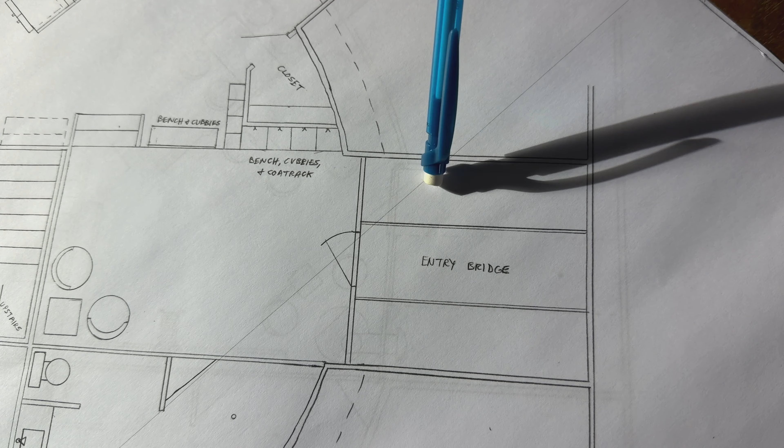We're thinking we'll put some kind of a recessed entry from outside and maybe some kind of a bridge type setup. That way the downstairs will be open — you'll actually be on the lower level, but it'll feel like you're outside, almost like an atrium downstairs. There's a drain downstairs already, so it's really set up for that. We didn't realize that, but when we met with Dale, the founder of Formworks, that's what he said this was really designed to be, so we drew it that way.

You come in across this big entryway area where you're standing right now, and we would keep that floor at a higher elevation. We come down a few steps, and then this whole level is kind of the same height, matching up with the height to the garage. We did put in a little mudroom area — some benches, cubbies, and coat racks — whether you come in from the garage or from upstairs.

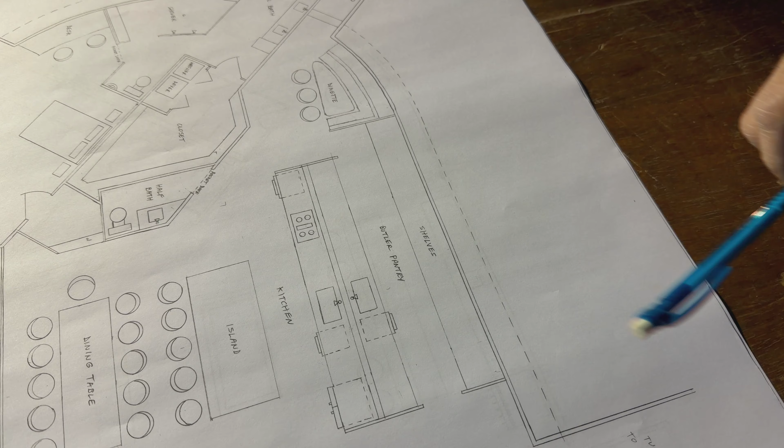When you enter, you're basically in the area here, which is the kitchen. Because the wall here is sloped inward, we can't put the kitchen right up against the wall, so we're going to create a little butler's pantry. This side will be low shelving that goes up and terminates at the wall, and on the inside, this wall is full height, so the cabinets in the kitchen can be full height.

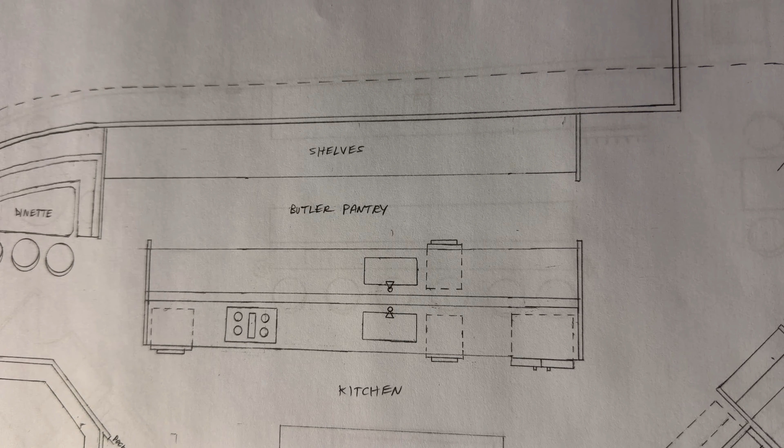This will be a kind of back area where you can do — what is a butler's pantry, honey? You know more about that than I do. It's for food prep, all of our small appliances like our blender, food processor, and mixer will be back there. We've also added an extra sink back there and maybe a dishwasher too. Well, you can dream, right? We might stub it in, yeah.

So this whole big front area is a kitchen, the island, the dining table. It goes up here to this overlook that looks down into our great room. That's kind of what we're thinking.

And then you'll see something here that's kind of interesting — we're proposing to put in an elevator that will allow you to go all the way from the floor level to the second level, all the way up to the cupola, which would be up on the roof. We may put that in — that's like a wish list item.

If not, you still have to have stairs in addition to the elevator, so you'll see that we've added stairs here that go down to the lower level.

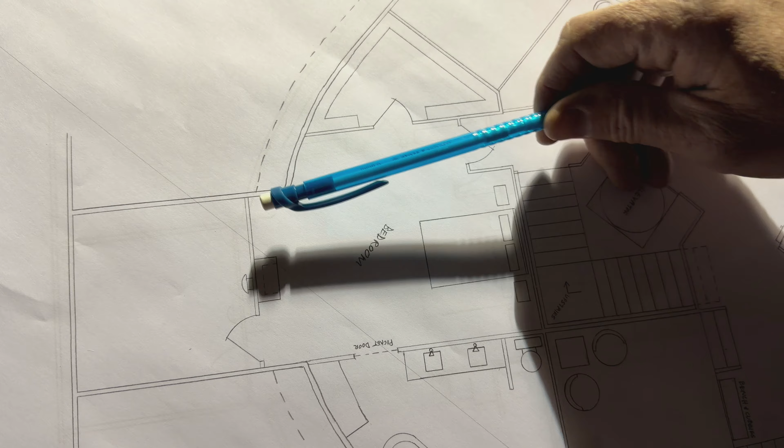And then the bedrooms — well, this is one of the annexes with the windows outside. We pulled the windows in about 12 feet, which will give you a covered patio. So bedroom here, bathroom over in this corner, a big closet. The idea is downstairs is almost identical — upstairs is a bedroom, downstairs a bedroom, and here's your egress to get out.

And then we've done this other side — we made the master bedroom upstairs, which is where it was always proposed to be. Same thing, you've got this nice annex with a covered patio, and if you look this way when you're out on the patio, you've got a beautiful view of Pagosa Peak. So this would be a big master bedroom.

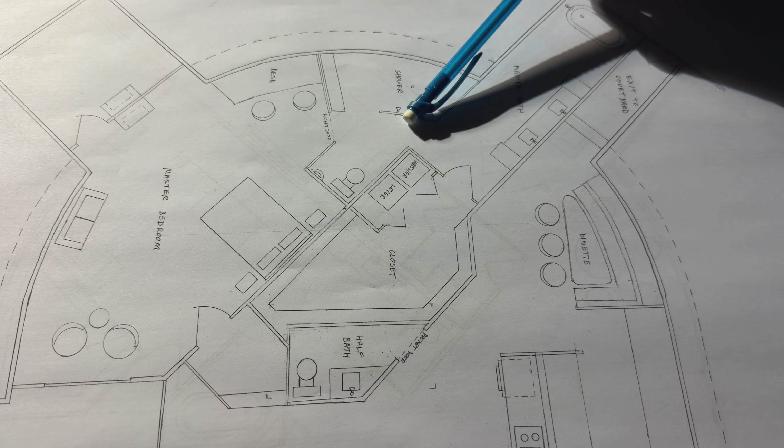This one we decided we wanted to go through the bathroom to get to the closet. So you come through here, there's a shower, toilet, and then - kind of a wish list item - we thought it'd be super cool to have the tub face a courtyard, with a great view to Pagosa Peak if we take down part of the wall to the courtyard.

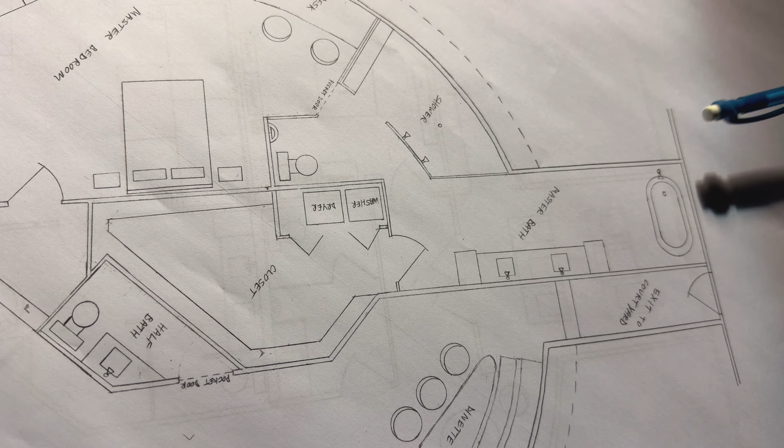So we've got the bathroom and the sink going around the corner here. Closet is here, so you go through the master, through the bathroom, to the closet. We put a little half bath out here.

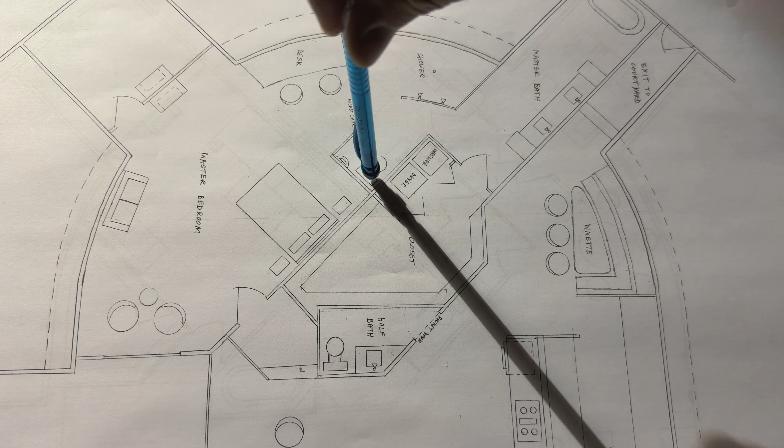A lot of the venting has to go out right there. There's a utility chase directly up overhead, so that's why the toilets and things are near the washer dryer. We put a washer dryer in the master closet - thought that'd be kind of cool. We may stub it in if we don't install it.

And then here's something else, a dinette. We love having a dinette, like a little table and a bench seat to sit on, so we put one right here next to the kitchen. Our thought is you can sit in the dinette, or go outside into the courtyard, where there'd be some outdoor seating, like an outdoor kitchen maybe.

So that's the second level, unless I missed something, Marie. Oh, I think you got it. That's a lot.

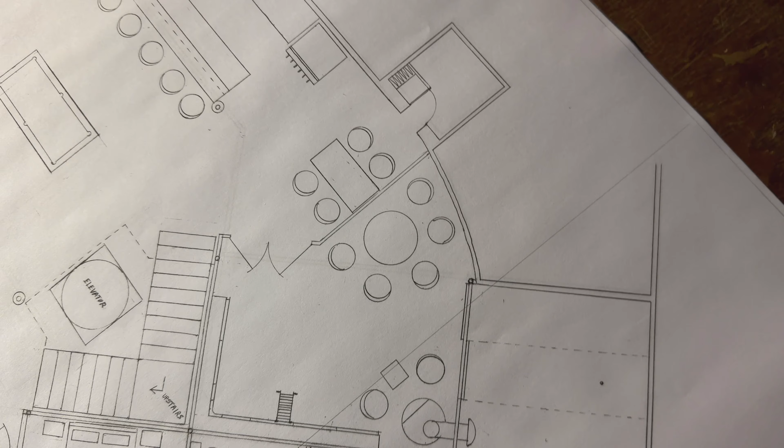And then this area - upstairs is a kitchen, downstairs is going to be the bar area, pool table, ping pong table, kind of a game room area. So this whole area is a big game room, with a little seating area here, and a dartboard.

And then you'll see - let's finish it - this part, off the game room, we thought you would have a little media room, so you can watch movies, a movie room.

This is necessary, you kind of go through here - the utility room, we have to have one. That's where the electrical comes into the building, and where a lot of the main water shutoff is. There's also a lot of the radiant floor heat already installed, so we'll probably put all that in that location.

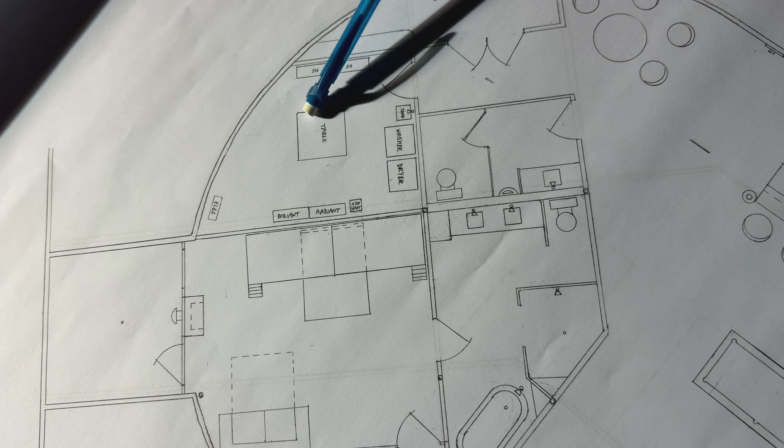And in doing that, our bedroom is here - there's a bedroom here, same kind of deal. On the other layout, we put the bathroom here, but because the utility room is here, we can't put it there, so we've moved the bathroom out to here.

Kind of come in, the closet's in the same place. The bathroom is just moved a little bit further to the back side of the bedroom, and we turned the bed. We also have this set up for our grandkids, so it's like a bed, 2 bunk beds, and this would be another bed or couch that turns into a bed.

Also put a half bath - actually it's really got a urinal in there too, because that's near the bar area, since nobody wants to lift or lower the lid.

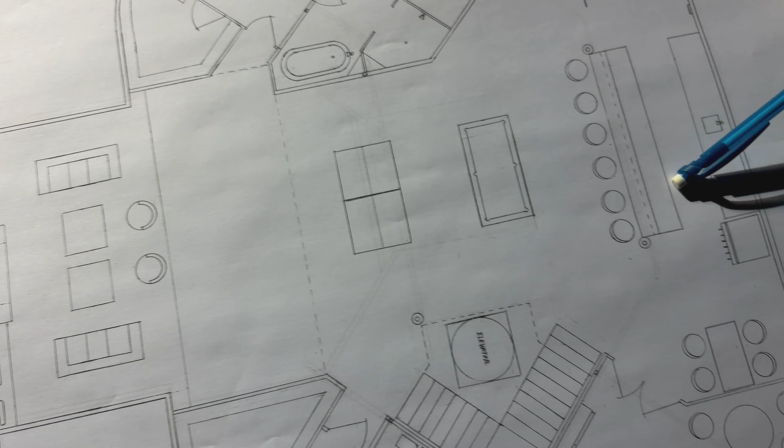This little area back here I kind of missed, off the bar - that's our little... what is it now? We call it the safe room. So we thought we would turn that into wine storage and other kind of bar-related things.

And then the great room - you can actually see the great room with some of our furniture shown and the fireplace, and we thought little bench seats on either side. That's gonna be a nice space. We've got really high ceilings, that one's got like a 24-foot ceiling. We'll probably put a big chandelier of some sort in there.

And that's what we got so far. It's still a work in progress - we still have to do elevation views, and see how it looks that way. We got to change it up, the way it looks from outside too. Anything else you'd like to add?

We've been working for 2 days mopping the garage, and to the naked eye you would not be able to tell how hard we have worked - but you can probably tell in my hair. We have mopped and swept for 2 days, but the floor was brown when we started, and now it's blue. We also cleaned out the back room of the garage, it's all nice and pretty now. So as we move from Texas, we're gonna have to use that space probably.

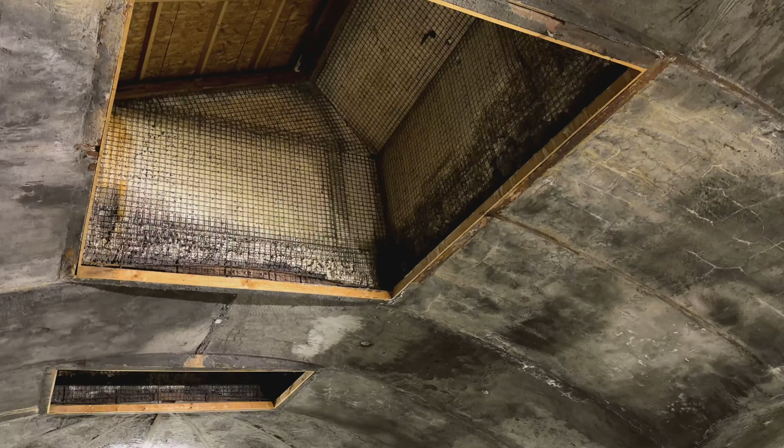I think it's going to work out nice. Look what's right above the island - the skylight. Skylight will be right above the island.

Okay, and then the dining room table is gonna be out here, right? Yeah, and on the edge of the island we had some chairs, then a little walkway, and right in here we'd have the big long table with chairs on both sides. But we're looking at the great room.

Okay, and just a railing along there, tapering over that way.

So that's pretty long, right? The butler's pantry - pretty long. And then once we get over here, we're gonna have our little dinette.

The little dinette would be kind of in this little corner here. So we'll be sitting on a bench there underneath that curve. That's gonna be cool. Yeah, I had like a little shelf that came out so you wouldn't hit your head, and then the bench would follow that curve around.

And then there would be a wall on this side of it, right? Yeah, just a little bit of a back. I think we had a wall here, and then that's the wall between the dinette and the butler's pantry, which is here.

Look how long that pantry is. Well, it's pretty big, yeah. Oh my goodness, I don't know. We got space, honey.

That's kind of crazy. And so then we were talking about raising this - no, or would we still step down right here? Yeah, you step in. Okay, over here a little bit?

We would have this floor - the drawing, the floor would be higher all the way over to this, again this is the dinette, so that's higher. The floor comes up higher all the way over to here, and then somewhere as you're going out the door, you'd have two little steps down over here.

Everything else is higher, so just as you're going down the little hallway to get outside, you'd go down 2 little steps, probably right in this area - you walk and you kind of step, and you're down.

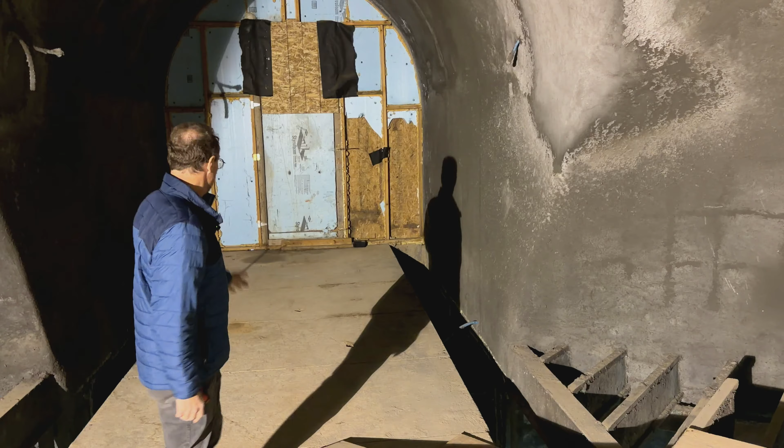And as drawn, the master bath is on half of this. But we show it over on this side. I don't know, I don't know if I want to hold all that room for a bathtub.

Yeah, well, we could put it over there. We'll see, I mean I like it, but it seems selfish to.

I'm leaving the kitchen, I'm going into the master bathroom right now. And then this is the master bathroom in here, master bedroom is over here. And then that goes out, and boy, there's just the most beautiful view of Pagosa Peak you've ever seen right there.

Right, it's out that window. Oh, it's really pretty. So yeah, that'd be the other option.

So, okay, cool - yeah, but that's all, folks.